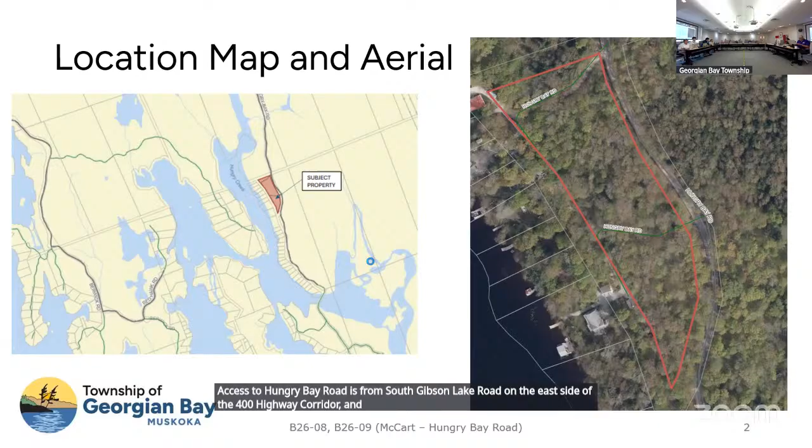The property is currently vacant land with 2 private roads that cross the lands. The subject property is comprised of 1.52 hectares and a frontage of 321.89 meters on Hungry Bay Road. The property does provide access to waterfront parcels. The private road subject to the easement request is at the north end of the property, while there is another private road laneway from Hungry Bay Road that provides access to other waterfront properties south of the properties subject to the legal easement being requested. Access to Hungry Bay Road is from South Gibson Lake Road on the east side of the 400 highway corridor, and the dominant lands subject to the easement request have frontage on 6 Mile Lake.

2 applications for consent were received by the township on April the 13th, 2026. At the request of the applicant, the applications are on the July hearing agenda. The portion of Hungry Bay Road that crosses the subject's land was conveyed to the owner, William McCart, in March 2020 by the township of Georgian Bay. The intent of the creation of the legal easement is to provide ingress and egress from the open municipal portion of Hungry Bay Road to the properties known as 432 and 440 Hungry Bay Road.

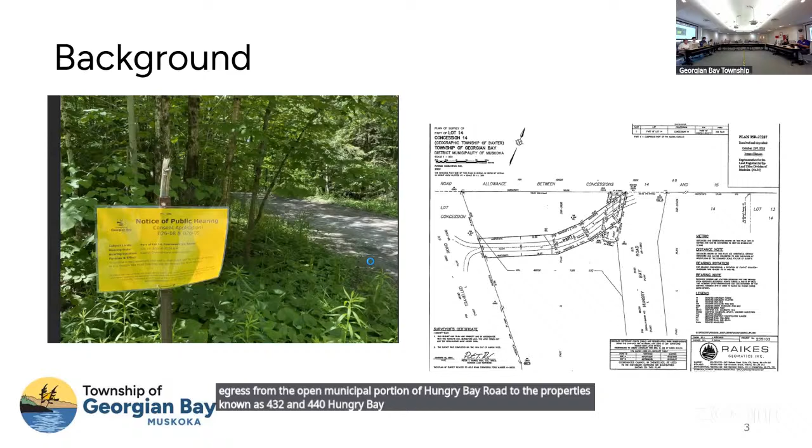The existing easement is described as Part 1, Plan 35R 27287, comprised of 759 square meters, and currently provides legal ingress and egress to 446 and 454 Hungry Bay Road. Consent files B2303A and B2303B were approved on July 14th, 2023 by the Committee of Adjustment, legally providing access to 446 and 454 Hungry Bay Road.

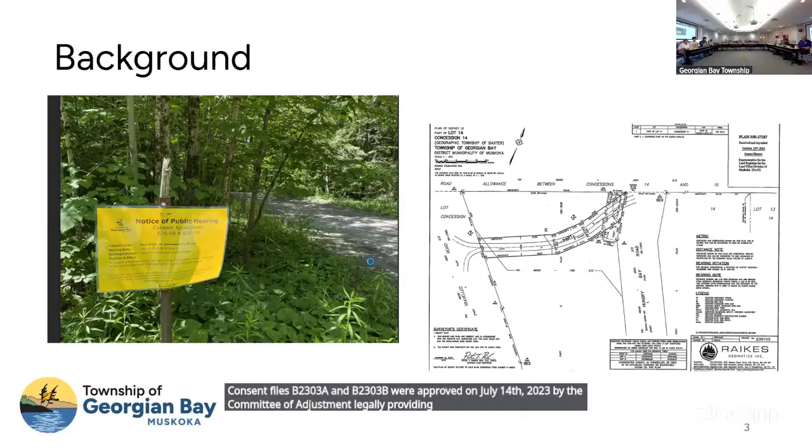The easement subject to the request is identified as Part 1, Plan 35R 27287, and is existing and does provide ingress and egress to other waterfront parcels. The 2 parcels benefiting from the creation of the legal easement are currently residential properties with single detached dwellings. The existing easement, which will provide legal access to both 432 and 440 Hungry Bay Road, has a width of approximately 10 meters.

The easement has an area, as stated previously, of 759 square meters. It is already being used by the 2 properties, and the intent is to legalize the use of the easement from the public portion of Hungry Bay Road. Planning staff have conducted a detailed analysis of the proposal based on applicable planning legislation and are recommending approval subject to standard conditions of consent. The committee has the option to approve, deny with reasons, or defer the application for additional information. Thank you.

There has been correspondence in this application. One letter was received from the District of Muskoka stating they have no objection to the application. One letter was received from Kaylee Nicholson, Chief Building Official, stating she has no concerns regarding this application. And one letter of support was received from Kevin and Karen Phipps.

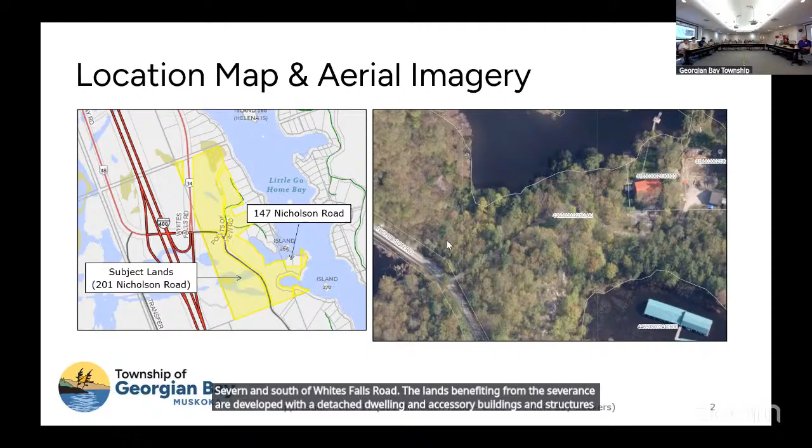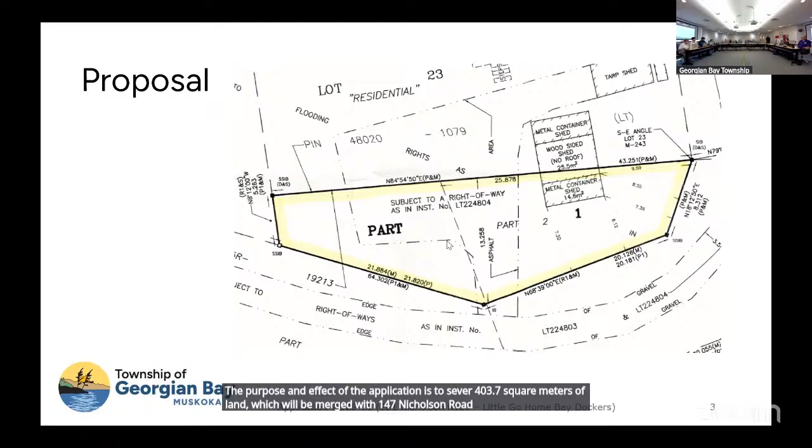Thank you, and through the chair. The subject property has an approximate area of 33.3 hectares and has water frontage on Little Go Home Bay with road frontage on Nicholson Road, Carson Way, and Points of View Road, which traverse the property. The lands are developed with a mooring facility and are located north of Port Severn and south of Whites Falls Road. The lands benefiting from the severance are developed with a detached dwelling and accessory buildings and structures, being municipally known as 147 Nicholson Road. The purpose and effect of the application is to sever 403.7 square meters of land, which will be merged with 147 Nicholson Road for the purpose of remedying accessory building encroachment issues.

The provincial planning statement defines development as the creation of a new lot, a change in land use, or the construction of buildings and structures requiring approval under the Planning Act. The application is for a boundary adjustment and is not development. Therefore, limited policies apply to the proposal and no supporting studies were triggered.

Within the district official plan, the lands are designated waterfront and the shoreline where the mooring facility is located contains type 2 fish habitat, while the privately owned bay abutting the subject and benefiting lands contains type 1 fish habitat. The Gloucester Pool provincially significant wetland is located on the west side of Nicholson Road, approximately 170 meters from the lands to be severed. Overall, the waterfront policies aim to balance environmental protection, recreation, and limited development while managing growth.

The boundary adjustment conforms with these policies as it represents a minor change that does not introduce new or intensified uses beyond those permitted, while maintaining the overall low-density waterfront character. It respects natural features, shoreline integrity, and existing development patterns, and has no negative impact on water quality, ecological functions, or public access.

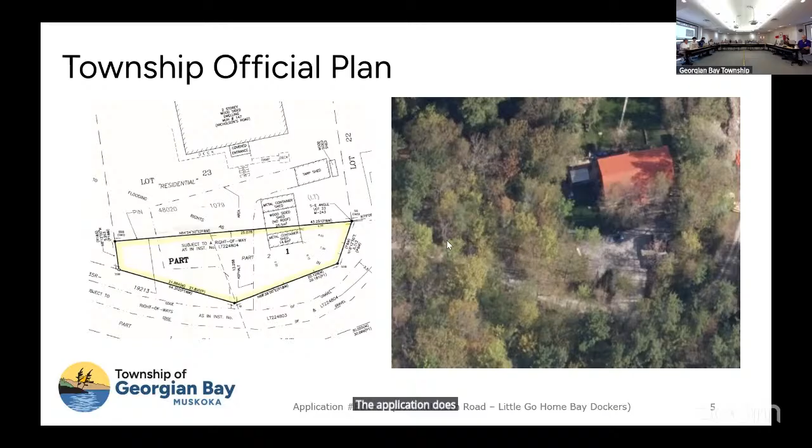Within the township's official plan, the lands are designated waterfront, which permits small-scale residential development, some commercial and small-scale tourist operations, public uses, and waterfront landings and access points. In accordance with the plan, 201 Nicholson Road is developed with a mainland waterfront landing, which is defined as a mainland parking and docking facility, which serves a commercial property or 4 or more residential dwellings, and is considered accessory to a permitted primary commercial or residential use. The application does not alter or expand the permitted use of the subject lands and does not constitute development. Therefore, it does not trigger the policies that guide development within the waterfront land use designation.

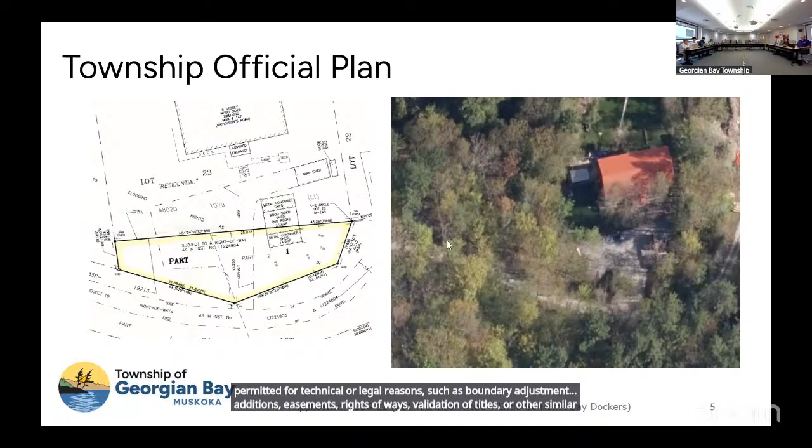Furthermore, Section I-4 of the official plan recognizes consent may also be permitted for technical or legal reasons such as boundary adjustment, lot additions, easements, rights of ways, validation of titles, or other similar purposes that do not result in the creation of a new lot.

Subject lands are currently zoned Marine Commercial Type 1, Exception 2 Hold, and partially zoned Environmental Protection Provincially Significant Wetland and Environmental Protection Wetland. The lands have frontage on a shoreline zoned Fish Habitat Type 1. The benefiting lands, 147 Nicholson Road, are zoned Shoreline Residential Type 1.

The 2 existing metal container shed and wood-sided shed, no roof, are partially located on the lands to be severed and do not comply with the 4-meter rear yard setback requirement. The boundary adjustment will provide for a 6.12-meter rear yard setback. During our site visit, staff observed that these 2 sheds were actually storage containers connected by a wood fence-like structure.

In accordance with the zoning bylaw, storage containers are only permitted within rural and industrial zones. The zoning bylaw also requires accessory structures within the shoreline residential zone to maintain a minimum separation distance of 5 meters from other buildings. Staff have included a condition of approval requiring the severed lands to be rezoned to the shoreline residential type 1 zone to match the zoning of the lot in which they will be merged and to address the issues of noncompliance related to the storage containers.

Furthermore, the boundary adjustment will increase the lot area of 147 Nicholson Road by 403.7 square meters from its current size of approximately 2,460 square meters. This change brings the lot closer to meeting the minimum lot area requirement of 4,000 square meters for the shoreline residential type 1 zone.

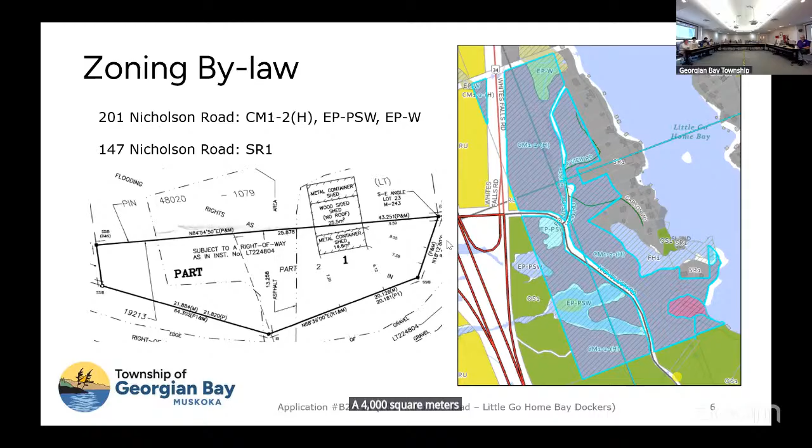Pictured here is the right-of-way and land subject to the boundary adjustment.

In accordance with the Planning Act, as the benefiting lands are a whole lot on a registered plan of subdivision, a deeming bylaw is required to facilitate merging the parcel with the lands to be severed. Planning staff have conducted a detailed analysis based on applicable planning legislation and recommend approval subject to conditions, including but not limited to a zoning bylaw amendment and deeming bylaw.

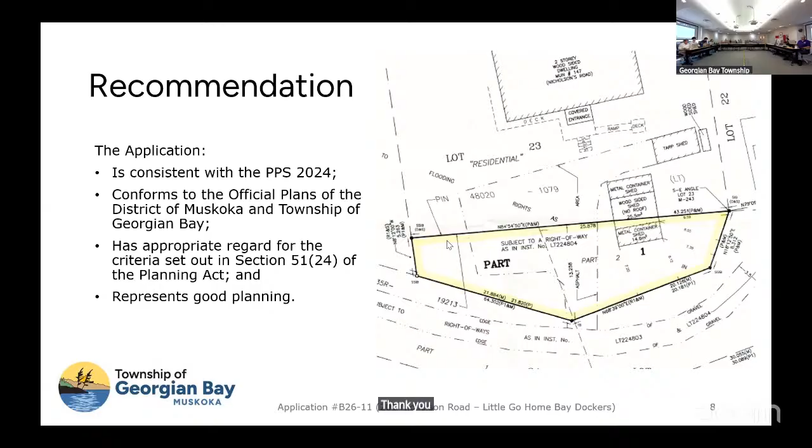Madam Secretary, has there been correspondence on this application? One letter was received from the District of Muskoka stating they have no objection. One letter was received from Kaylee Nicholson, Chief Building Official, stating she has no concerns. And one letter was received from the MTO stating they have no comment or concerns regarding this proposed application.

Is the applicant present and do they wish to address the committee? Could I have your name and address for the record, please? My name is Karen Rathwell, and my address is 201 Nicholson Road. I'm one of the families that owns this property.

What can you add to what the planner said? I just want to say I appreciate everyone's time and how easy the staff has made this for us. But I wanted to be sure there's understanding that these containers, which I think is part of the zoning hearing we'll have, just contain personal items, nobody's living in them, and there's no objection to them in our little area.

Thank you. Is there any member of the public present who wishes to address the committee on this application? Yes, sir, please come forward and give us your name and address.

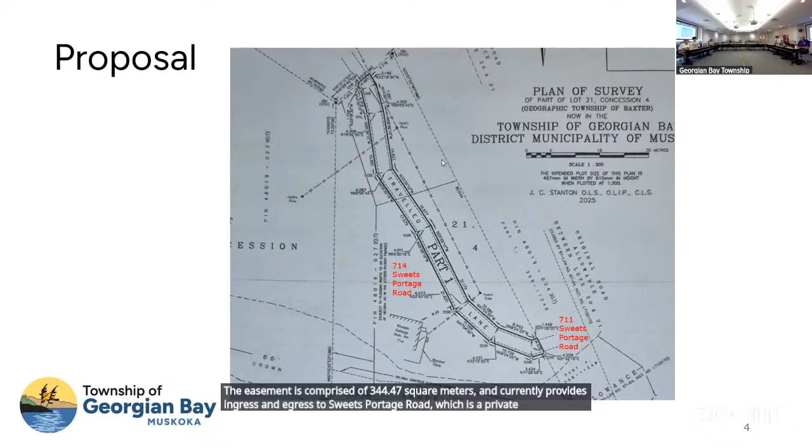Planning staff have conducted a detailed analysis of the proposal based on applicable planning legislation and are recommending approval subject to standard conditions of consent. The committee has the option to approve, deny with reasons, or defer the application for additional information.

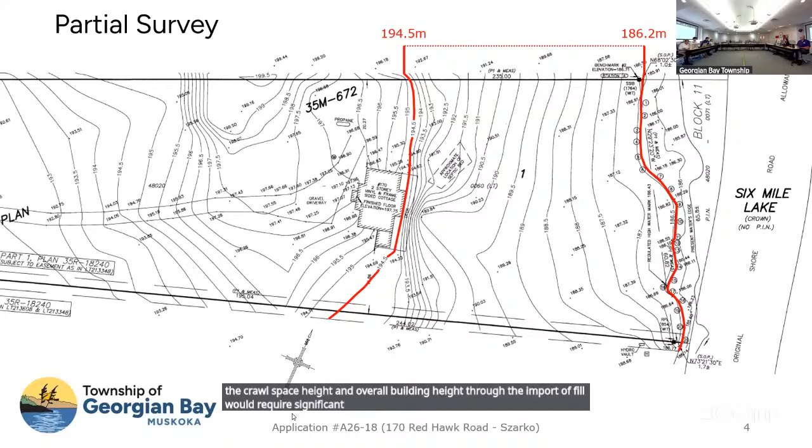Due to the steep grade change along the front wall of the dwelling, reducing the crawl space height and overall building height through the import of fill would require significant site alteration and would result in undesirable impacts to the natural environment.

The subject property is designated as waterfront area under both the district and township official plans. The waterfront is a unique recreational resource and land and water asset, and as such, the development permitted should enhance and protect the natural heritage qualities.

The development enhances and protects the natural heritage qualities of the waterfront by maintaining a substantial shoreline setback of 54.2 meters and preserving the dense mature vegetation buffer to the water's edge. The continued use of the property for a single unit dwelling with no expansion to the building footprint and no intensification of use reflects the traditional development pattern and maintains compatibility with the surrounding land uses.

As per the 6 Mile Lake dwelling size policies in the township official plan, variations to dwelling size standards may be considered depending on the size of the lot and the dwelling, respecting the aesthetic integrity of the natural heritage and character of the community. Further variances to the established maximum size may be considered where the applicant provides evidence satisfactory to the township that the dwelling will maintain and enhance the natural form of the area and the visual impact will not be significant.

The dwelling's significant setback from the shoreline, combined with dense vegetation screening, ensures it remains largely unobtrusive to the water. The proposal does not increase the building footprint, and the recognition of the existing height and addition of the basement do not contribute to increasing massing or visual prominence. As such, the dwelling avoids an overly large appearance, preserves the natural form and aesthetic integrity of the waterfront, and remains compatible with the established character of the community, therefore satisfying the criteria for a minor variance.

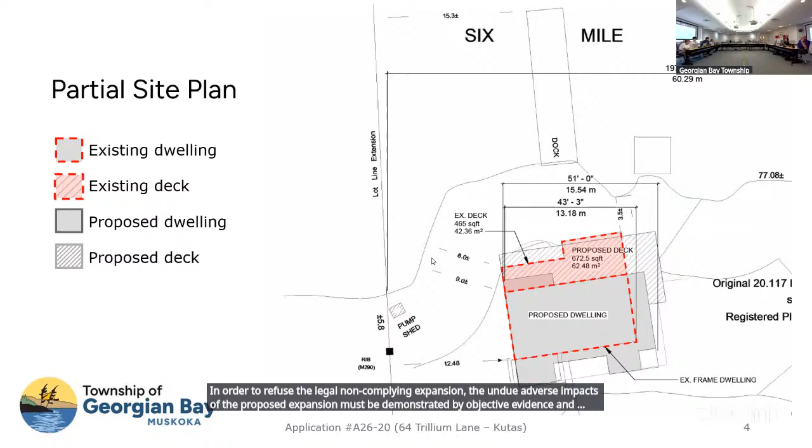All 3 of the required variances are considered expansions to a legal non-complying dwelling or structure, meaning that the entirety of the application is to be considered under subsection 45(2) of the Planning Act. In order to refuse the legal non-complying expansion, the undue adverse impacts of the proposed expansion must be demonstrated by objective evidence and must be sufficient to override the property owner's right to reasonable flexibility, evolution, and expansion.

No adverse visual, privacy, or environmental impacts on the adjacent properties are anticipated as a result of the proposed development. The proposed dwelling is to be strategically sited in the general footprint of the existing dwelling, maintaining its current visibility to the neighboring properties and the lake. Existing vegetation will continue to provide effective visual screening, and as a result, views from the adjacent property amenity areas will be largely maintained, and the proposed expansion is not expected to negatively affect the enjoyment, use, or character of the neighboring properties.

The dwelling is most visible from the shoreline, where the front facade is orientated toward the waterfront. The majority of the expansion is directed toward the rear and south side of the existing dwelling, where the building width will increase by approximately 2.36 meters and the overall height will increase by 2.1 meters, creating a 1 1/2 story dwelling. Despite these modifications, the scale of the expansion has been designed to remain subordinate to the natural landscape and existing vegetation.

The committee can either approve or deny the variances being requested. The committee may also defer the application to a later date if additional information is required to come to a decision. Planning staff have completed a detailed analysis of the variances to the zoning bylaw being requested and are recommending approval subject to conditions. Thank you.

Thank you. Madam Secretary, has there been correspondence in this application? One letter was received from Keely Nicholson, Chief Building Official, stating building permits are required. The existing sewage system appears undersized and will be reviewed through the building permit process. A permit will not be issued until the proposed development complies with all applicable Ontario Building Code requirements.

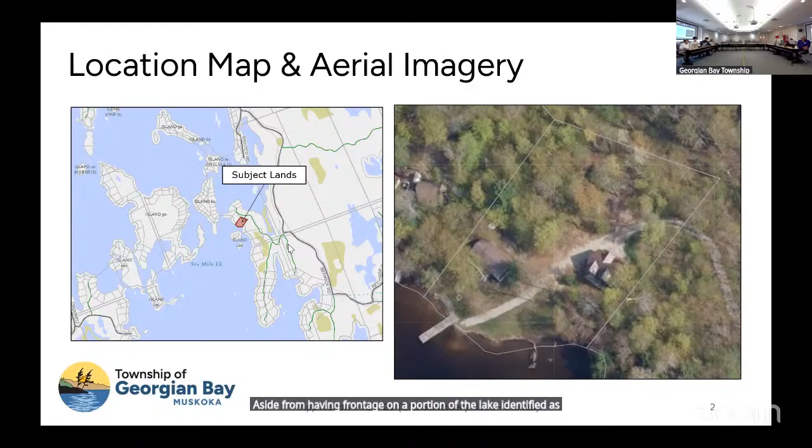Thank you, through the chair. The subject property has an area of 4,182 square meters and a frontage of 58.8 meters on 6 Mile Lake. The subject lands are developed with a detached dwelling, a detached garage, a shed which is to be removed, and a dock. The lands are designated waterfront in the district and township official plans within the 6 Mile Lake inland waterfront community. Aside from having frontage on a portion of the lake identified as a narrow water body, there are no development constraints or significant natural heritage features.

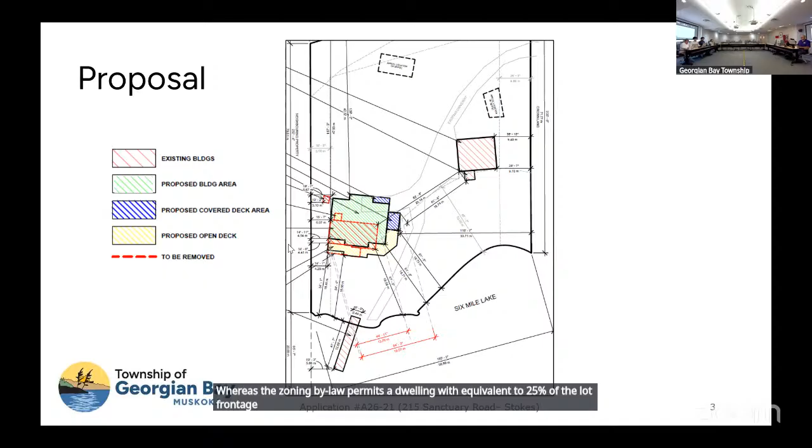The purpose and effect of the application is to seek relief from the zoning bylaw to facilitate the reconstruction and expansion of a legal non-complying shoreline dwelling. The applicant is seeking a gross floor area increase of 146.73%, or 114.92 square meters, whereas an increase in the gross floor area of a legal non-complying shoreline dwelling of 70%, or 54.82 square meters, is permitted. Also, a dwelling width of 33.23% of the lot frontage, or 19.57 meters, whereas the zoning bylaw permits a dwelling width equivalent to 25% of the lot frontage, which in this case is 14.72 meters.

The variance pertaining to the proposed gross floor area of the dwelling is subject to two tests, as the dwelling is legal non-complying, and the total gross floor area does not exceed the maximum permitted in the 6 Mile Lake residential zone. The tests for an application for permission to expand are whether the application is desirable for appropriate development of the subject property, and whether the application will result in undue adverse impacts on surrounding properties in the neighborhood. Only the proposed expansion may be evaluated for undue adverse impacts.

The applicant is proposing a gross floor area increase of 146.73% to the existing dwelling, which has a gross floor area of 78.32 square meters or 843 square feet. The proposed dwelling will have a total gross floor area of 193.2 square meters or 2,080 square feet.

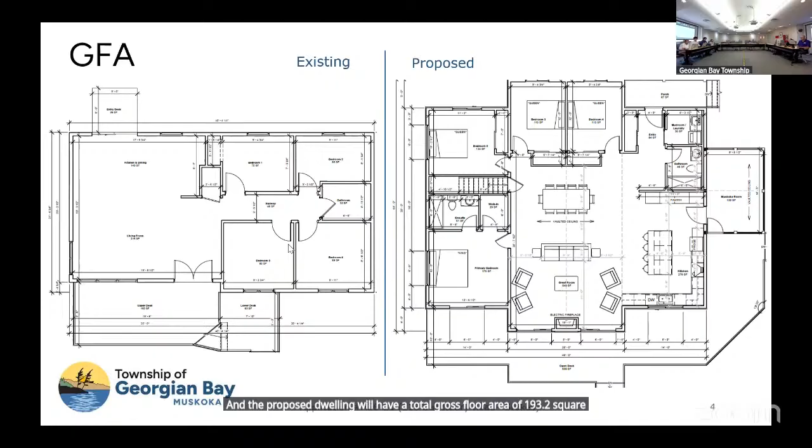As outlined in the associated staff report, staff are of the opinion the increase in gross floor area is desirable for the appropriate development of the property and will not result in undue adverse impacts on surrounding properties in the neighborhood. The expansion is largely directed to the rear of the existing dwelling, minimizing changes to the established building presence and reducing visibility from the shoreline and neighboring properties. The majority of the additional floor area is located at or beyond the 20-meter front yard setback, thereby maintaining an appropriate separation from the water and limiting visual impact.

The total gross floor area complies with the maximum permitted based on the lot area in the 6 Mile Lake residential zone, being 209 square meters. The front yard is not being reduced, and the expansion is designed to comply with the required 5-meter side yard setback. Existing vegetation and tree cover will continue to screen the dwelling, maintaining privacy and reducing visual impacts on adjacent properties from the water.

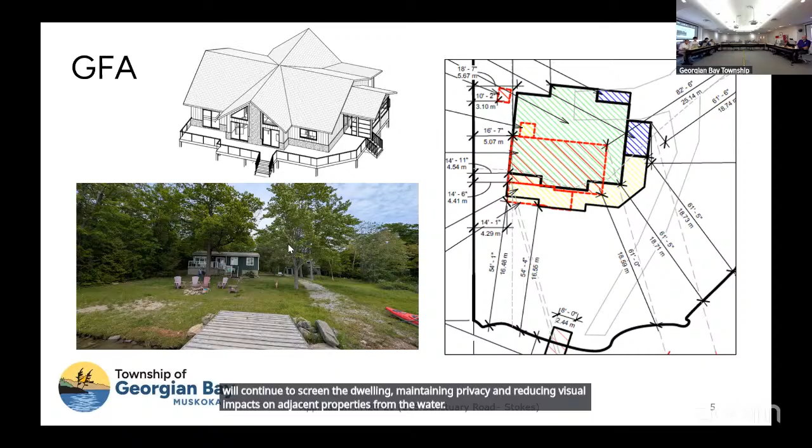The variance related to the proposed dwelling width must be evaluated against 4 tests, as the proposed expansion exceeds the maximum width permitted in the 6 Mile Lake residential zone. While Section 411E of the zoning bylaw allows for the expansion of legal non-complying shoreline dwellings, it does not permit development beyond the standards of the underlying zone.

The proposed dwelling has a width of 19.57 meters, whereas the existing dwelling measures 13.7 meters in width. The zoning bylaw permits a maximum dwelling width of 25% of the lot frontage, which in this case equates to 14.72 meters. The intent is to regulate building massing along the shoreline, ensuring that dwellings do not present an overly expansive visual profile when viewed from the lake, and that development remains compatible with the character of 6 Mile Lake.

In this case, while the dwelling width exceeds the maximum permitted, this is largely a function of how dwelling width is measured rather than a proportional increase in dwelling width. The zoning bylaw requires measurement parallel to the shoreline. However, the dwelling is oriented at an angle.

As a result, the width is measured diagonally from the front corner to the rear corner of the proposed Muskoka room, which inflates the technical width. From a built form and visual perspective, the front facade of the dwelling, being the portion most perceived from the shoreline, is increasing modestly from 12.3 meters to 14.63 meters.

This represents a minor expansion that remains within the intended 25% frontage limit. The additional width beyond this is attributable to a 3.04 meter wide Muskoka room projecting from the side of the dwelling. This projection does not contribute significantly to the perceived massing of the dwelling from the lake, which remains 1 story.

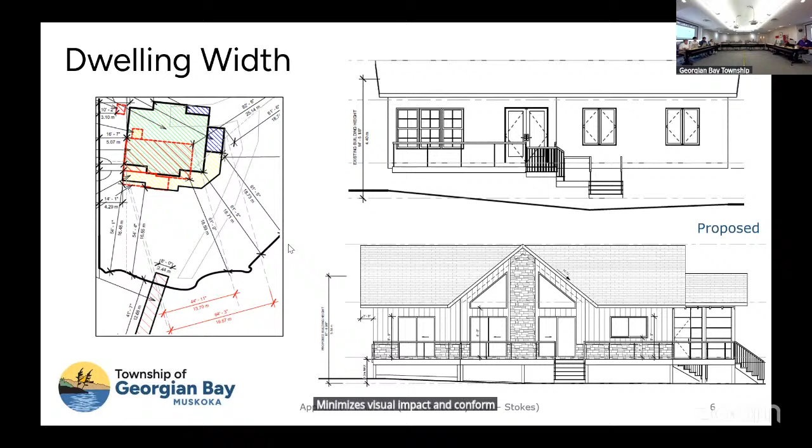The policies note that preserving, restoring, or enhancing native shoreline vegetation, along with increased setbacks from the lake, may support modest increases in dwelling size. Variances may be considered where it can be demonstrated that the proposal maintains the natural form of the area, minimizes visual impact, and conforms with applicable 6 Mile Lake specific policies and environmental objectives.

In accordance with the official plan, staff are recommending a condition of approval requiring the enhancement of the natural state shoreline area through the planting of native vegetation within 15 meters of the shoreline. This measure will improve shoreline naturalization, enhance visual screening, and ensure that any increase in building width is appropriately mitigated.

Shown here are additional photos of the existing dwelling and area of expansion.

The Committee of Adjustment can either approve or deny with reason the variance pertaining to the proposed dwelling width. For the committee to deny the variance applied for under 45.2 pertaining to the gross floor area, the undue adverse impacts of the proposed expansion must be demonstrated by objective evidence and must be sufficient to override the property owner's right to reasonable flexibility, evolution, and expansion.

The committee can defer the application to a later date if additional information is required to come to a decision. Planning staff have completed a detailed analysis based on applicable tests under the Planning Act and are recommending approval subject to conditions. Thank you.

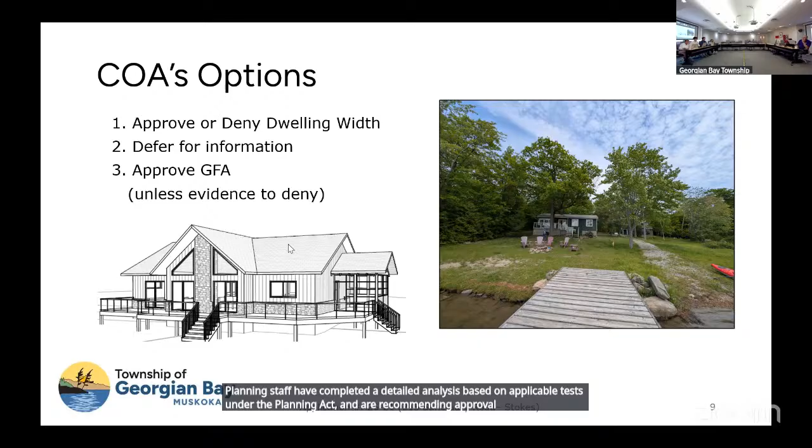Madam Secretary, has there been correspondence in this application? One letter was received from Kelly Nicholson, Chief Building Official, stating that a building permit is required and a review of sewage system will need to be completed. And 3 letters of support were received by Kevin and Stephanie Flew, RJ Wilson and Robert Wilson, and Sue Mortison.

Thank you. Is the applicant present and do they wish to address the committee? Good morning. And what is your name? Victoria Hoffman, 3 Violet Drive, here on behalf of Sean and Sherry Stokes.

This application, we're proposing a 193.2 square meter new dwelling, which is under the 6 Mile Lake standard for the cap on the GFA, but because of the 18.5 meter front setback that we're looking to retain, we are over the percentage that section 411 would let us go up to.

What's interesting about the gross floor area and the new building design versus the existing building design is that although the new GFA is 193.24 square meters, of that 10.5 square meters is within the front yard, the 20 meter setback. The existing GFA at half that, 78 square meters, there's actually more of the floor area within that 20 meter setback, about 15 square meters. So just the way the building has gone back and we kind of tiered the front walls of it, it actually makes less square footage in the required yard.

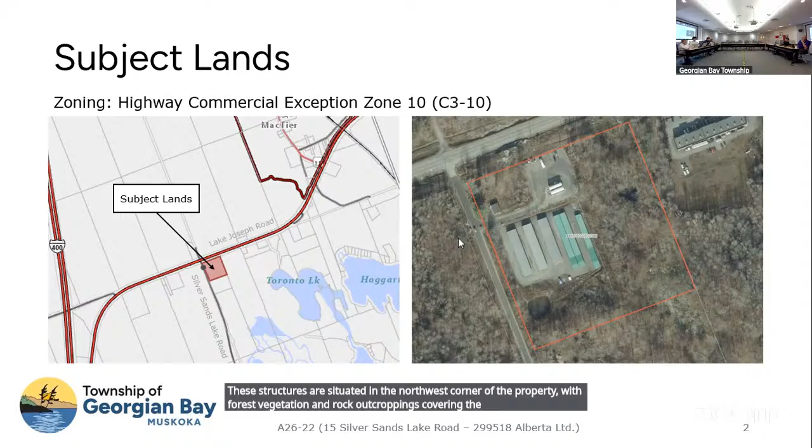The purpose and effect of this minor variance is to seek relief from the zoning bylaw to facilitate the placement of 2 additional bulk storage propane tanks, the placement of a diesel fuel dispenser, and the legalization of 2 existing sheds. The bulk storage propane tanks would result in an exterior side yard setback of 27 meters, whereas 30 meters is required. The fuel dispenser would result in an exterior side yard of 3 meters, whereas 5 meters is required. The legalization of the existing sheds would result in exterior side yard setbacks of 0.55 and 0.85 meters, whereas 5 meters is required.

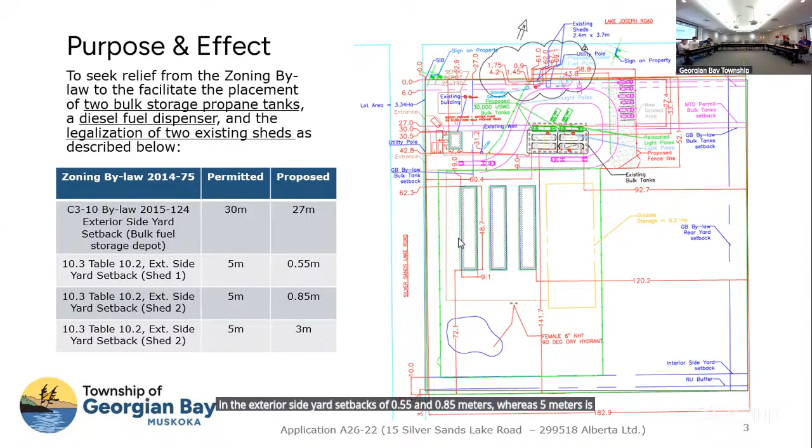The bulk fuel storage tanks are proposed immediately adjacent to the existing tanks, while the diesel fuel dispenser is proposed along the north fence line. This siting maintains the necessary turning radius area and parking areas for the propane trucks that use the facility.

The existing sheds are also located along the north fence line of the propane compound. They contain the mechanical components for the existing propane system, including the electrical and heating systems, compressors, safety valves, and fluids. These sheds appear on aerial imagery between 2013 and 2018, constructed without the necessary planning approvals.

Much of the property is deemed of having a low to moderate wildfire hazard rating, although a portion of the forested area to the east of the current storage compound is extreme. However, the proposed development is further from the existing approved bulk storage fuel tanks with approximately a setback of 45 meters.

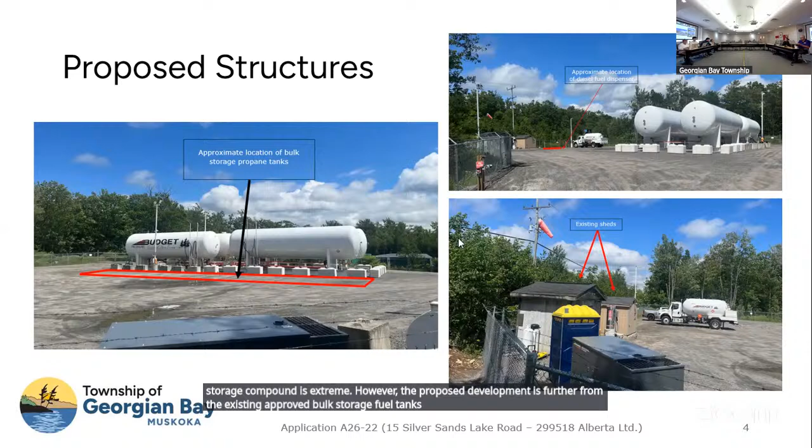It is the opinion of planning staff that the proposed development passes all 4 tests. It has a minor variance or a minor impact on the environment, as no natural heritage features are disturbed and no vegetation removal is required. It has no impact on the use of neighboring properties, as interior side yard setbacks are maintained, in addition to natural screening by outcroppings and trees, and it does not alter existing servicing or access.

The development is consistent with other fuel bar and fuel storage uses along Lake Joseph Road, and it is an expansion to the existing uses of the property without constituting overdevelopment, as lot coverage is maintained at 8.2%, whereas 30% is permitted. The proposed development constitutes the expansion of a rural resource use, permitted in rural areas, specifically being a land-intensive resource use within 1 kilometer of the MacTier urban center boundary.

Likewise, the development conforms to the economic development policies specific to the MacTier urban center by providing a vital business and service function to the surrounding lake communities. It relies on individual on-site sewage and water services, and it does not introduce additional vehicular access points or traffic impacts. Bulk fuel depots and bars are permitted uses within the C310 zone.

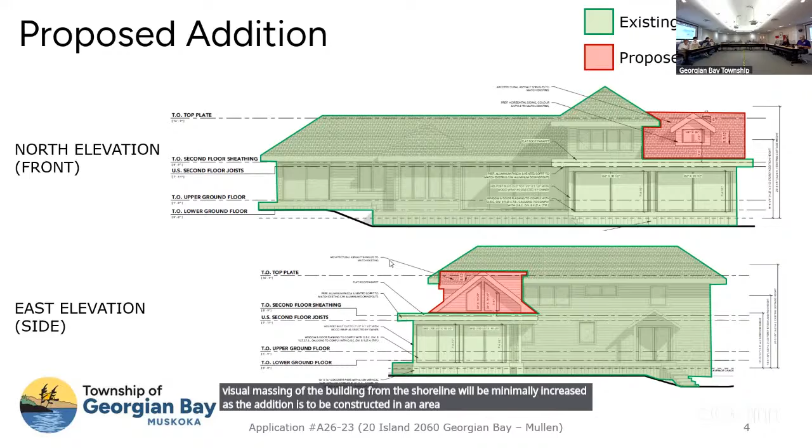Specifically, minor variance A2511 permitted the construction of a single-story sunroom addition onto the northwest corner of the existing dwelling. The application before you today proposes to construct a half-story study addition atop the sunroom with a front yard setback of 15.63 meters, bringing the total gross floor area to 293.85 square meters. The view of the shoreline is not anticipated to be intensified as a result of the construction of the addition. As seen in the north and east elevation drawings, the width of the dwelling will not be increasing, and the height will be less than that of the existing partial second story. Given the orientation of the building with respect to property frontage, the visual massing of the building from the shoreline will be minimally increased, as the addition is to be constructed in an area having a visual backdrop of the dwelling's existing partial second story.

The Cognashene policies speak to the protection of natural heritage features within the waterfront community; the conservation of the overall natural landscape, tree cover, and vegetation shall be encouraged in an effort to preserve natural appearance, character, and aesthetics of the area. At this time, the framing of the sunroom is complete and the owners have confirmed that no mature tree removal has taken place. However, the condition of approval remains from the previous application, which addresses the retention of the existing native vegetation, encompassing the completion of the first-story sunroom construction and the proposed half-story study construction. A mature tree and vegetation retention plan, as displayed on screen, will be included in the amended minor variance agreement. As seen, the present vegetation surrounds the north extent of the building, permitting a suitable area of expansion behind natural screening.

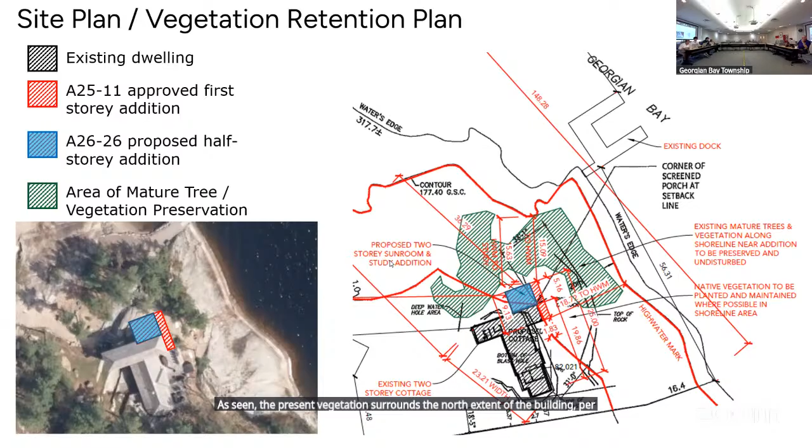As depicted in the site photos displayed, there will be no hazard or flooding concerns with the proposed addition being located in closer proximity to the water, given the significant elevation change between the current water's edge and the plateau where the dwelling is located. The location of the proposed addition will be behind the retained vegetation screening. The photos shown on screen display the vegetation screening between the sunroom addition and the shoreline, which is to be preserved by way of the minor variance agreement. Please bear in mind that the sunroom, as well as the proposed half-story study, will be finished with dark-colored exterior siding to match the aesthetic of the existing dwelling and work to blend with the natural environment.

The committee can either approve or deny the variances being requested. The committee may also defer the application to a later date if additional information is required to come to a decision. Planning staff have completed a detailed analysis of the variances to the zoning bylaw being requested and are recommending approval subject to conditions. Thank you.

One letter was received from Kaylee Nicholson, Chief Building Official, stating building permits will be required and the septic system will be reviewed as part of the permit process. One letter was received from the Cognashene Cottagers Association stating they are in support of the 1.5-story concept that conforms

to the Cognashene community plan, reflects good planning principles, and sets a positive example for future applications. And one letter was received from Wattsmuth and Scott, indicating that based on the revisions made to the current application, they have no objection to the proposal and believe the changes have improved its conformity with the Cognashene community plan.

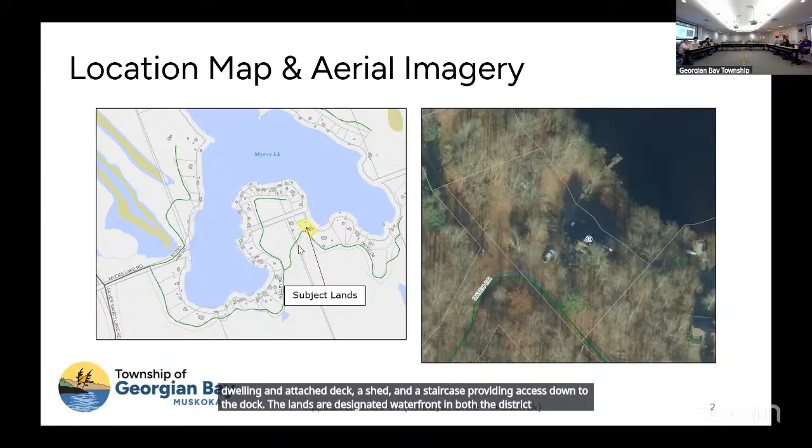Thank you, through the chair. The subject property has an area of 2,241 square meters with a frontage of 60 meters on Myers Lake. The subject lands are developed with a detached dwelling, an attached deck, a shed, and a staircase providing access down to the dock. The lands are designated waterfront in both the district and township official plans and zoned shoreline residential type 1. The purpose and effect of the application is to seek relief from the zoning bylaw to facilitate the replacement and enlargement of the septic system, which will have a setback of 23 meters from the high water mark, whereas the zoning bylaw requires new and expanded systems to have a minimum setback of 30 meters from the high water mark. The new larger system is required to service the number of bedrooms in the dwelling.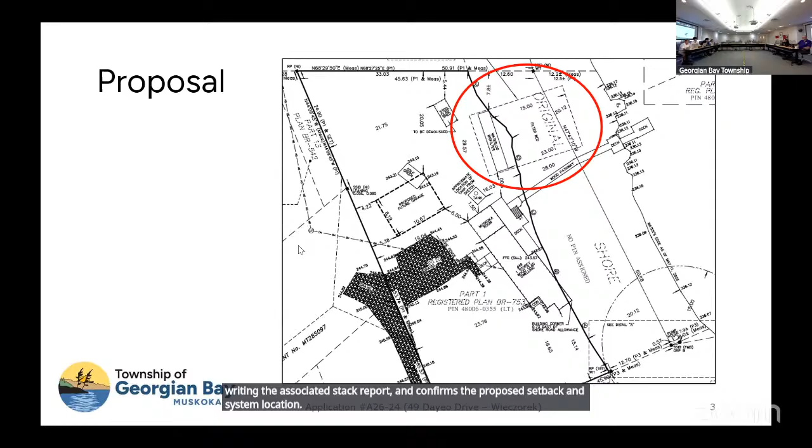An environmental impact study prepared by Vasey Valley Ecological Solutions was prepared in support of the proposed septic system location to assess the potential impact on the type 1 fish habitat. The ecologist concluded that, contingent upon the implementation of their recommendations, the development will have a low likelihood of negatively impacting type 1 fish habitat on or adjacent to the site.

The township's environmental consultants, Hutchinson Environmental Sciences Limited, reviewed the study, noting several concerns and questions. Planning staff received a revised study on Friday, July 7th, for which Hutchinson peer-reviewed, finding that 8 comments were fully addressed, 4 comments were partially addressed, and 1 comment was not addressed, recommending that the remaining outstanding issues be resolved prior to issuing development approval.

The recommendations of the environmental impact study support the intent of the waterfront designation by ensuring that natural features and ecological functions are protected during the installation of the proposed septic system. Specifically, the study recommends that natural vegetation be retained in its existing state and that a heavy-duty silt fence be installed along the down gradient edge of the construction area to prevent sediment migration during site works.

The official plan requires a 30-meter setback from the high water mark for an individual on-site sewage service bed, but in the situation where the required setback is not feasible and where an on-site phosphorus management plan is implemented, a reduced setback will be considered. The plan states the purpose of this policy is to site individual on-site sewage service beds in the best location for phosphorus management.

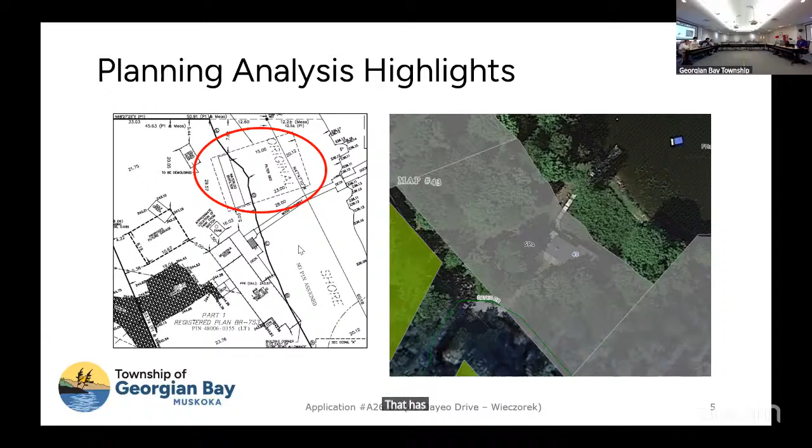Upon receipt of a revised environmental impact study that has been reviewed and deemed satisfactory by the township's environmental consultant, staff are of the opinion that the application meets the intent and purpose of the official plan and zoning bylaw.

Pictured on the left is a view of the dwelling from the driveway, and on the right is a picture of the dwelling and the granite rock outcrop in the side yard taken from the approximate area of the septic system.

Pictured here is another photo of the side yard and the grass area next to the fire pit where the septic is located, as well as a photo of the property taken from the shoreline.

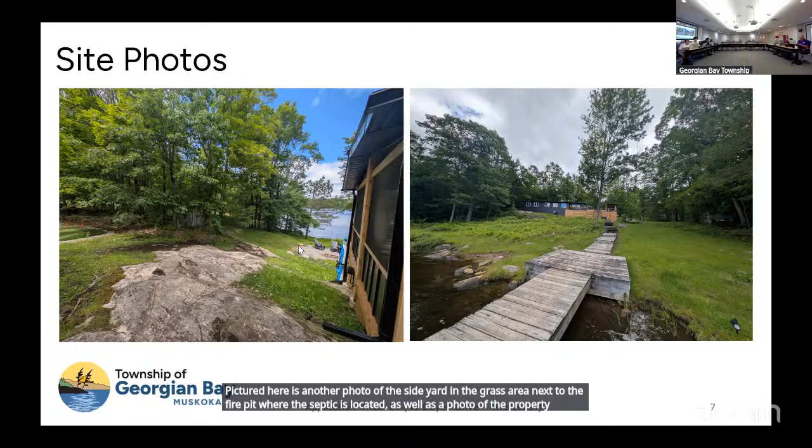Planning staff are recommending that the application be deferred to allow the applicant time to submit a revised environmental impact study, which is deemed satisfactory by the township's environmental consultant. The committee can approve, deny, or defer the application. Should the committee approve the application, planning staff have prepared a resolution contained within the associated report, including two conditions requiring the property owner to provide a satisfactory study and to enter into a minor variance agreement registered on title. Thank you.

Has there been any correspondence on this application? One letter of objection was received from Babs Balzac, who expressed concerns that the proposed reduction to the shoreline setback could negatively impact water quality, establish an undesirable precedent, and is not warranted given the proposal appears capable of complying with the required 30-meter setback. Two letters of support were received from Lisa Caparelli and Pam and Cliff Jordan, and one letter was received from the township's clerk's department stating they have reviewed the site plan and confirmed that there is no concerns with the septic bed being located within the shoreline allowance, provided that the septic tank remains entirely outside of its boundaries. However, should the owners wish to obtain building permits for any structure proposed within the shoreline allowance, they must first purchase the applicable portion of the shoreline allowance from the township before permits can be issued.

Any questions on this application? Yeah, so my name is Daniel Wieczorek, 49 Dayeo. I don't have any comments, but I can answer questions.